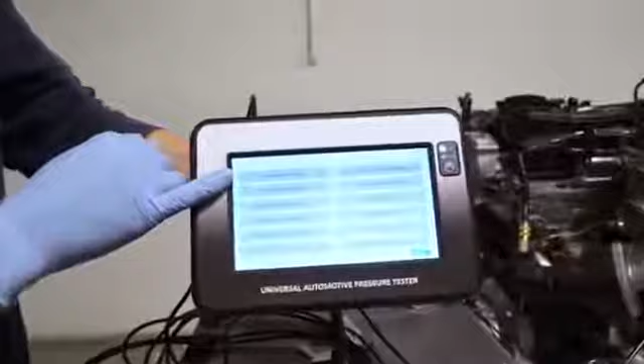Let's go to the tests. The first test we are going to make is the compression test. To make the compression test, you have to put the false injector here. So we already set it - it's sitting in place of one of the injectors on the cylinder on which you want to take the measurement. And we are going to connect the 0 to 300 bar sensor.

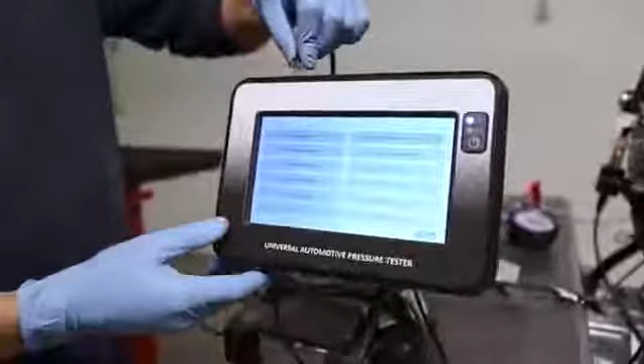So I'm connecting the cable that comes from the sensor, and I can crank the engine.

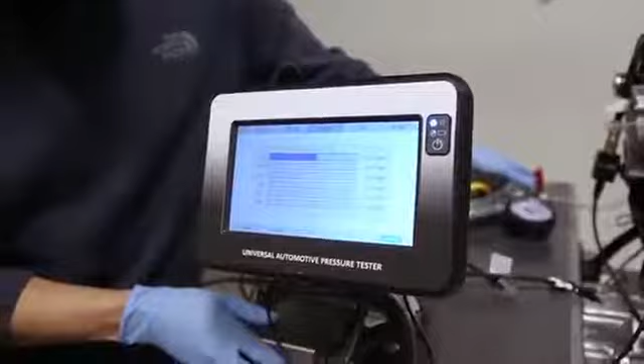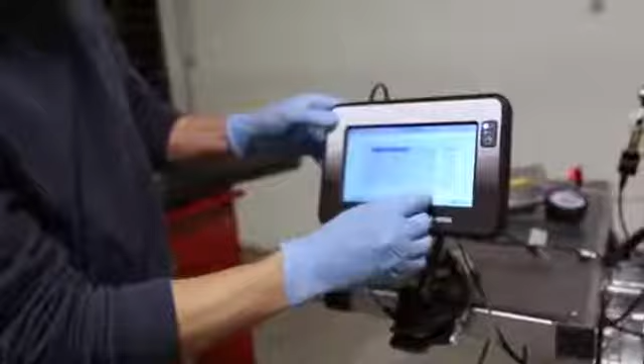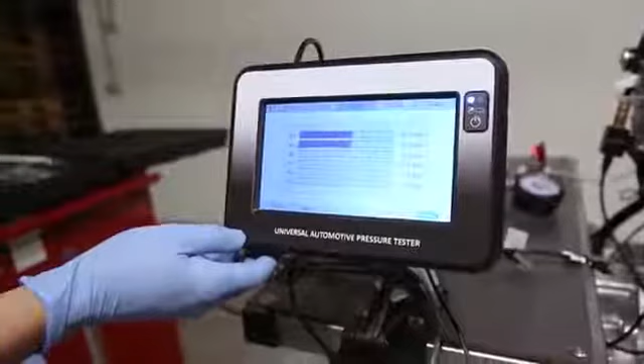If I want to go to the second cylinder, I would have to disconnect it and reconnect it. I'm connecting to the same on the display, of course. Go to the second one here and crank again. Of course it gives almost the same value because this is the same cylinder. This was the compression test.

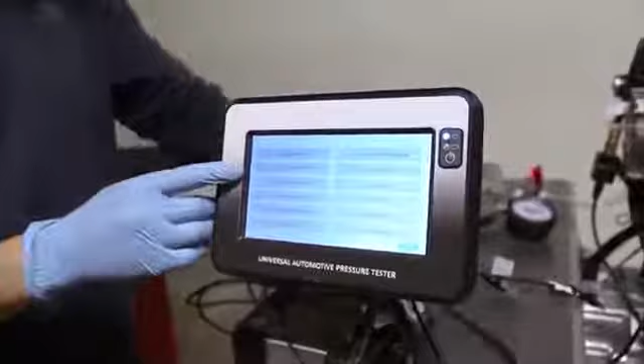The second test we're going to make is the fuel low pressure. Here we are already connected with the adapter. On the engine, on the car, the line would go here to there. We just disconnected it and put the T adapter here, which allows us to take the measurements with this sensor, the metal sensor. In this case, this is adapter number 1. It could be another one on other engines.

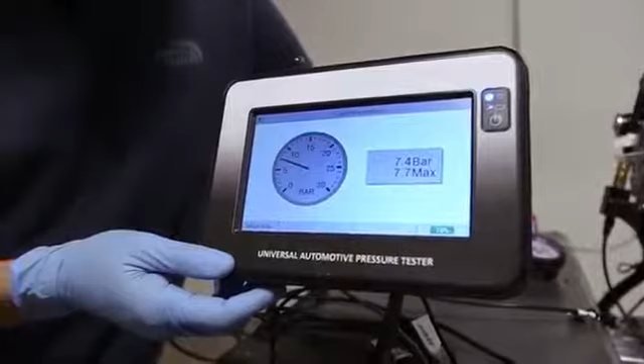I've already connected the right wire, fuel low pressure, okay, and I'm going to activate the pump. It always remembers the maximum value.

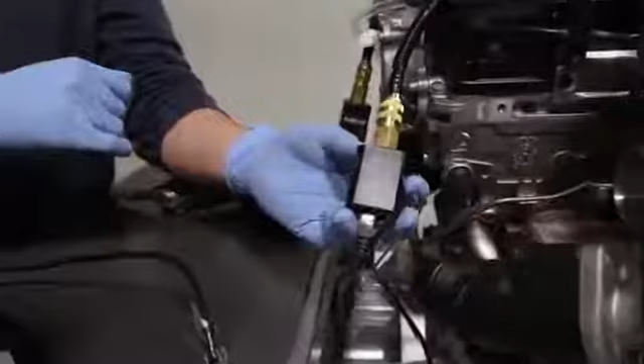The third mode I'm going to show is the turbo pressure. Here I already connected the right wire. In here, this is the adapter, the plastic adapter, and we are connected to the turbo. Of course, to make the measurement, the engine should be running.

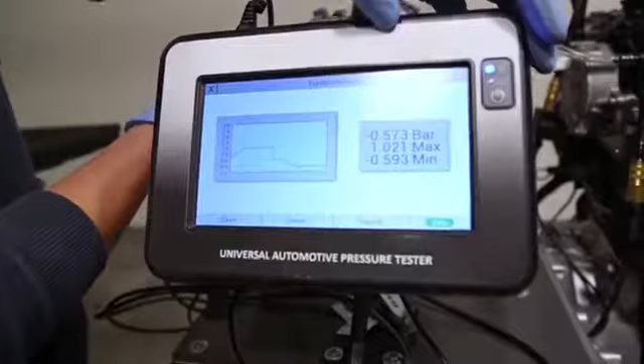So here I'm going to simulate that the engine is running using a pump. And here is what you would read if the engine was running - you have the reading of both the vacuum and the low pressure, and it remembers the lowest and the highest.

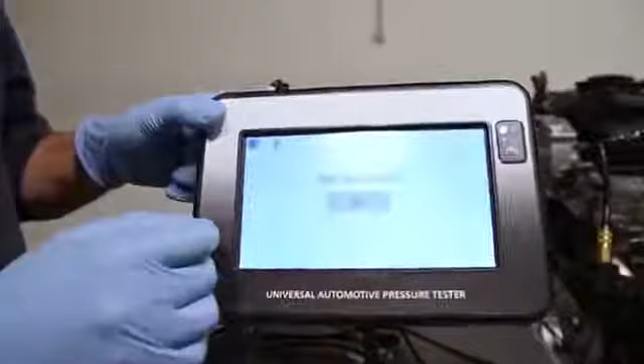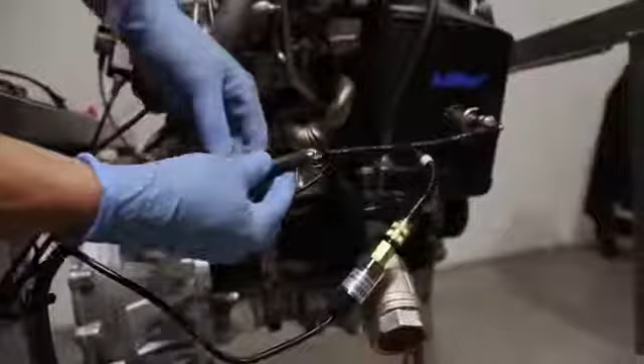Now for the AdBlue pressure. The connector is here, so just like in the second example, we use one of the T adapters. The line of the car should go directly there. We removed it and put the T adapter with this sensor. In this case, this is adapter number 3. So this is the line that goes directly on the AdBlue injector on the particulate filter.

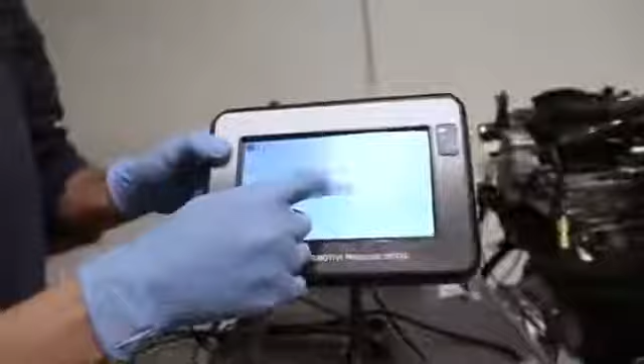It's connected, and I'm going to activate the pump.

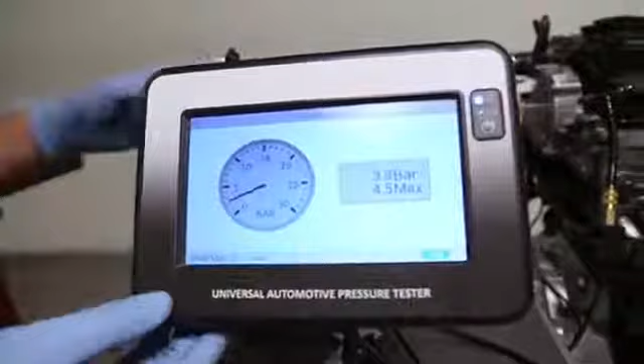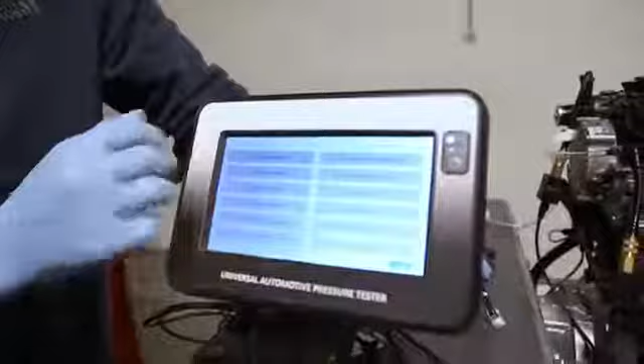For the next test, we have the cooling system pressure. Well, we can't test this on the engine because, of course, this is an engine rig only - we don't have any liquid in the engine. Loss of cylinder pressure is an optional set that will be available soon; it's not available right now.

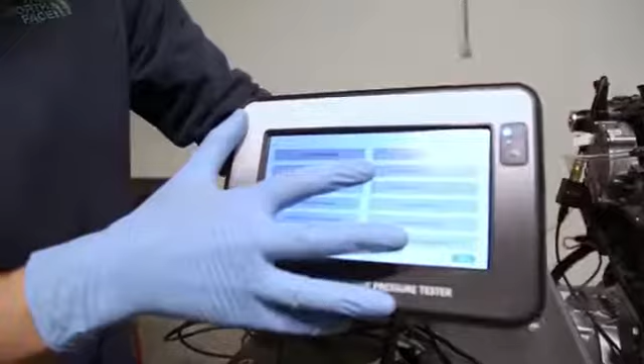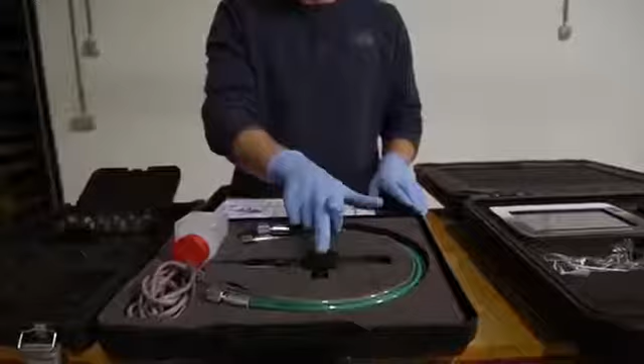So let's go to the common rail pressure, fuel high pressure. I need to explain a bit before we go on the engine rig. We have three optional sets. The first one, which you will need in any case, is the one with the 2000 bar sensor, that will allow you to make the measurements with the two hoses.

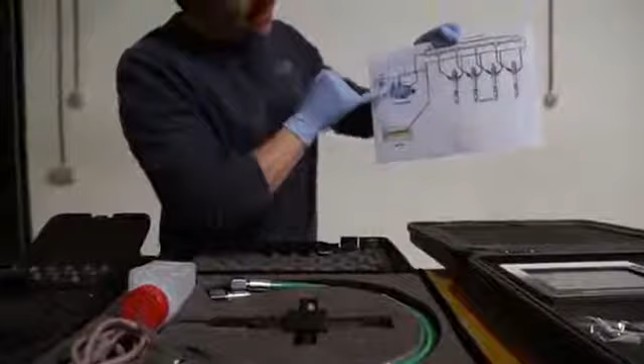With this, you could disconnect the line that goes from the pump to the common rail. So you remove this line, and you connect the hoses with the sensor in the middle to make the measurements.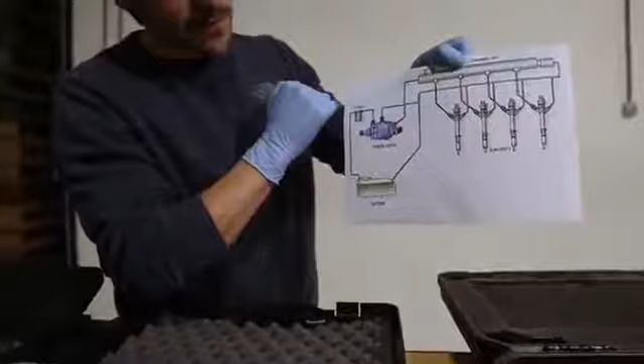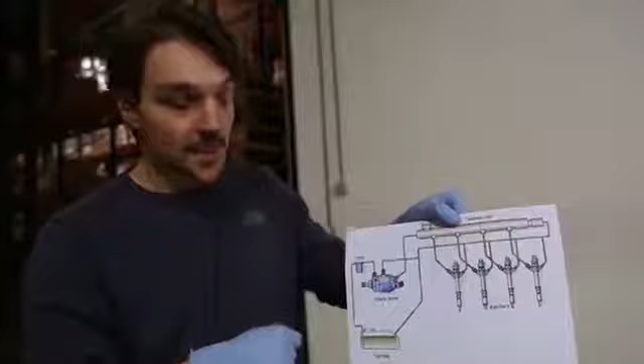You could also measure the pressure from the common rail to one of the injectors the same way. I'll come back to this when we go on the engine. With this set and this set, you will locate an issue on the common rail system. With this one, it's only a measurement. So let's begin with this one.

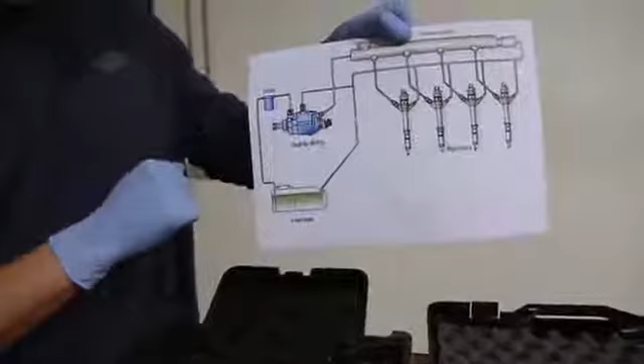This one will help you identify if you have a problem with the regulator on the pump. So you remove the regulator and put one of these dummy caps. With the first one, you take the pressure and see if you come back to a normal pressure. That would mean the regulator has a problem.

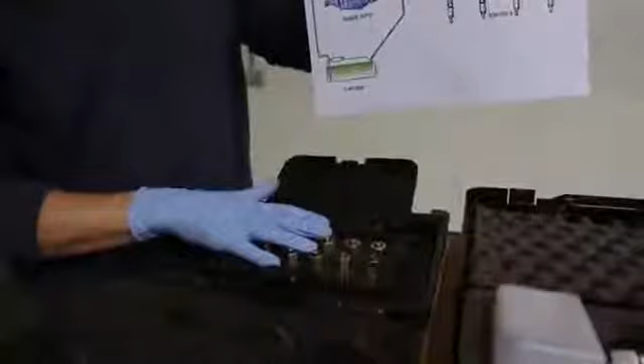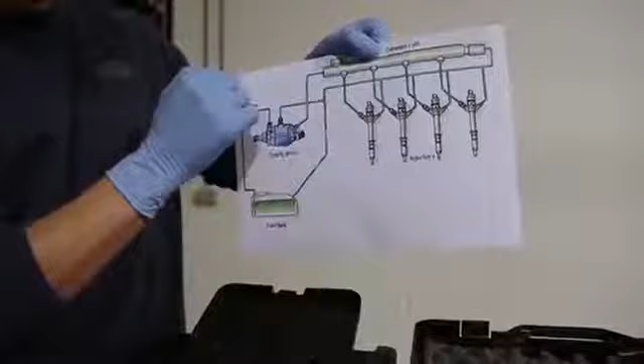The second one allows you to block these fuel inlets that go from the common rail to the injector. The purpose is to locate a faulty injector. Remember, the injector might leak from the return line, but they also leak in the combustion chamber. With the previous kit where you collect fuel from the return line, you cannot see what's leaking directly into the combustion chamber. With this one, no problem.

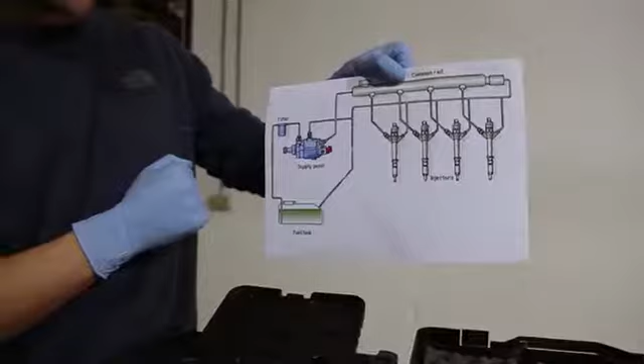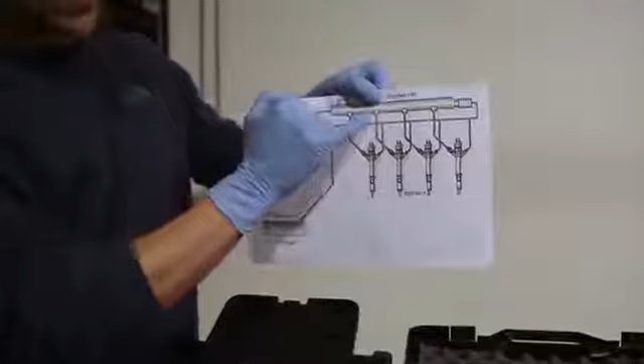So you connect here with the first kit, the hoses and the sensor. You block, let's say, three injectors and let only this one connected, and go from injector to injector to identify where you lose the pressure.

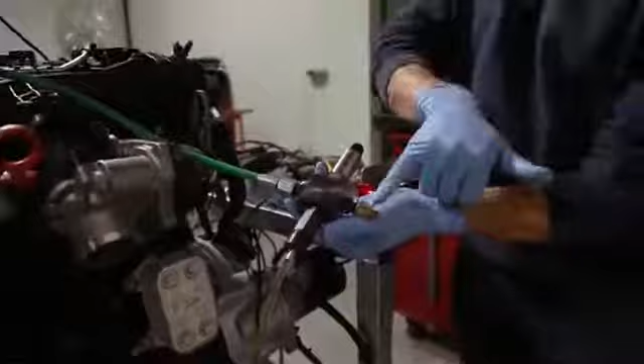So let's get back on the engine. Here we are connected on the full pressure of the pump because we mounted the cap here. The other thing we did was already mount one of the dummy caps to bypass the regulator here.

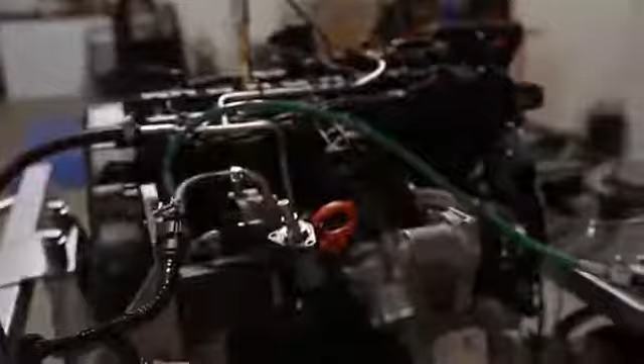The pressure I'm going to have right now is what we call the real pressure, the full pressure of the pump, which should be around 1,300 bars. In this configuration with the cap here, we have the real pressure, as I just said. Some will say we're supposed to be reading 1,900 bars of pressure. That might be true, but we have information from the pump manufacturers, Bosch, Delphi, and so on, that if we have 1,300 bars of pressure, we have enough pressure for the common rail. It means the pump doesn't have a problem.

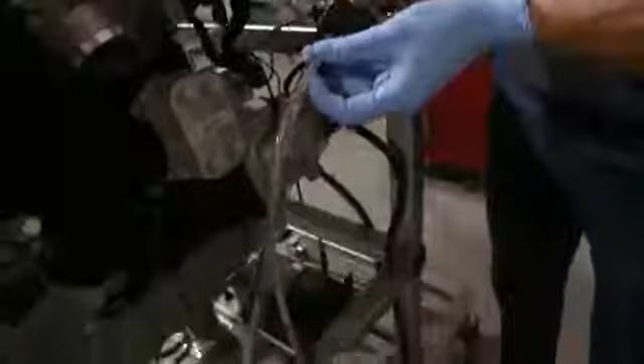So what we did, in order to have a safety margin with both the sensor and the hose, which are 2,000 bar approved, is add a release valve at 1,300 bar. So when the pressure approaches 1,300 bars, the fuel will be redirected to this small reservoir. If we want, we can make the engine run.

In this setup, the engine will not run because we don't feed it with fuel. If we connect the second hose from here to the common rail, we can make the engine run. So let's go back on the screen.

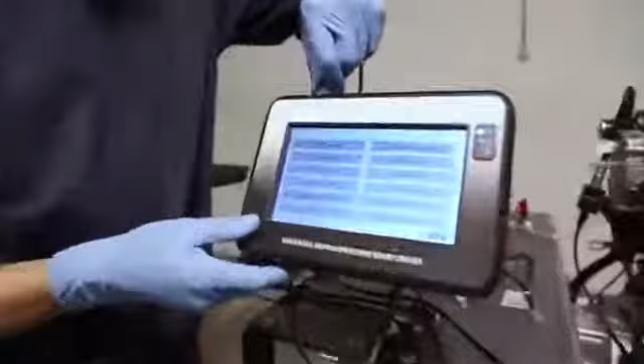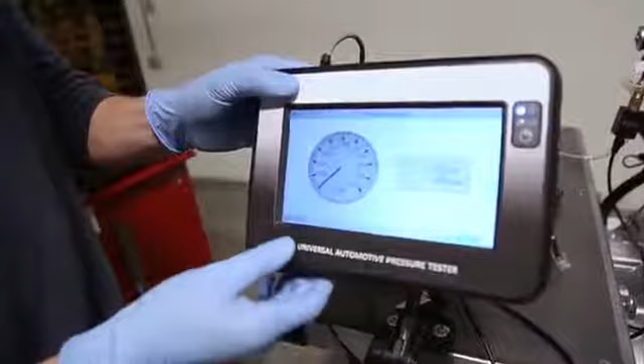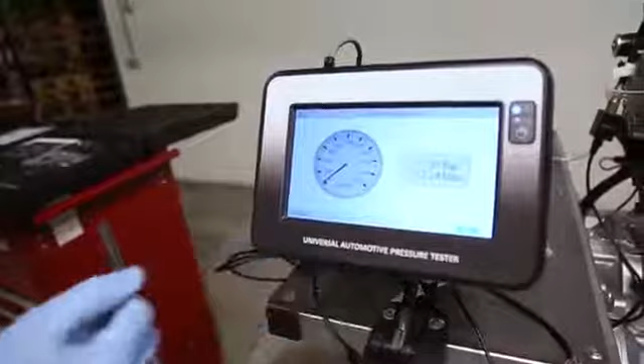I'm connecting the sensor. Fuel high pressure. And we have, I would say, a normal pressure. If the second hose were connected, you'd have a running pressure of around 300 bars.

In case I wasn't clear enough, these three sets are for diesel common rail only. The gasoline common rail adapters will come very soon.

Now for the vacuum test, we are going to connect the low pressure sensor, the plastic sensor, connected directly using adapter number 6 directly on the vacuum pump. I already connected the right one, and I'm cranking the engine.

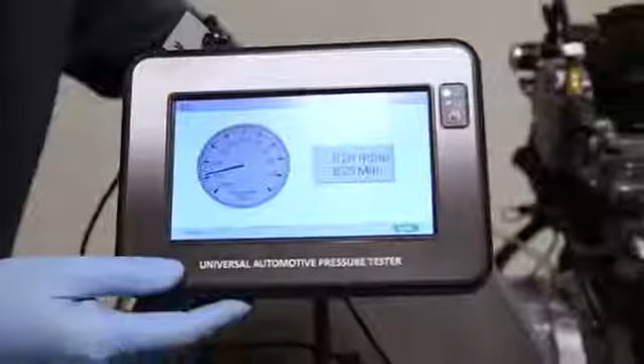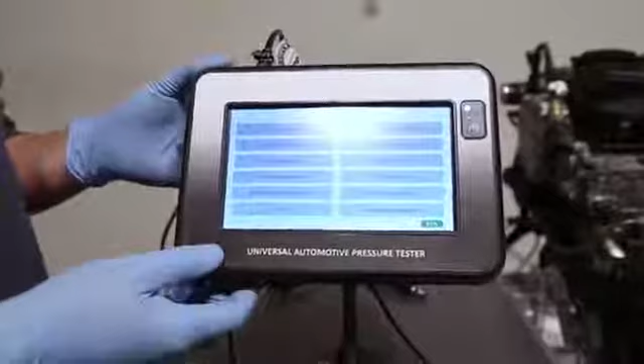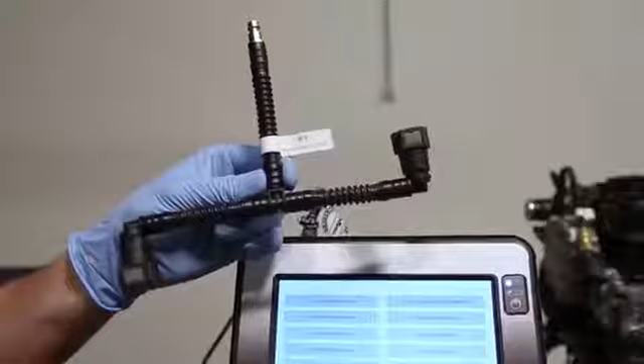Now for the oil pressure, I unfortunately cannot make the test on the engine rig because the engine doesn't have the oil radiator, but we would have to connect this adapter number 2, which is already at 90 degrees. Much easier when connecting on the radiator.

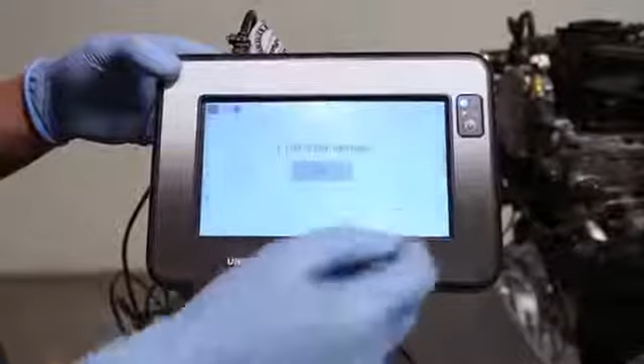And now for the last test we are going to make today, the particulate filter. You know that on a car's particulate filter, the car calculates if the filter is blocked using a differential of pressure. For that, there's a hose after the filter and a hose before that goes to the differential pressure sensor. In this case, we are going to use the hose before the particulate filter, and we are already connected with the plastic sensor.

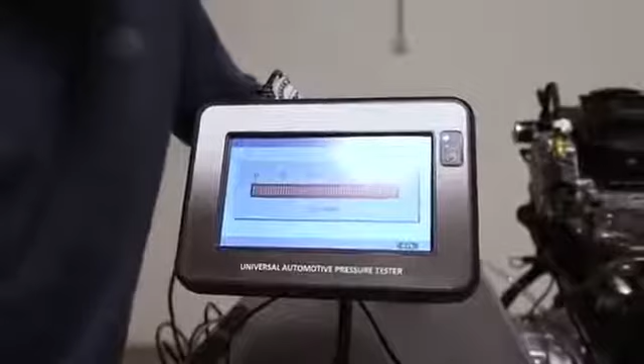So here I'm simulating, using this, a blocked or not blocked particulate filter. The first one I'm going to make is fully open. It's in the green. I'm blocking it a bit. Still in the green, a bit more. It's actually closed. And that's it for today.